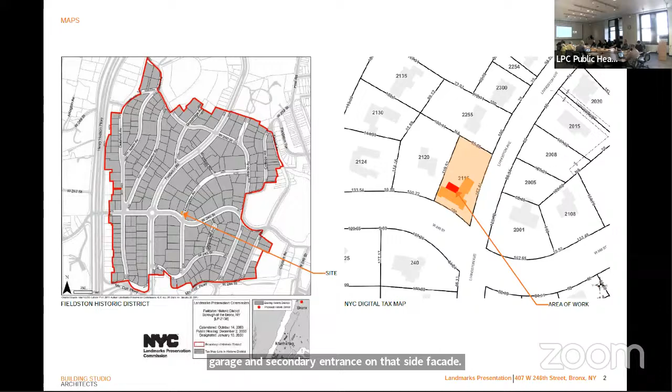So then once again, to orient you, at the corner of West 246th and Livingston Avenue, it is an L-shaped building with the primary entrance on West 246th and the garage and secondary entrance on that side facade. The area marked in red here is the location of an existing addition above which the proposed addition will be constructed. As mentioned, the house was designed by Dwight James Baum in the Georgian Revival style, and here you can see the original plan on the bottom right of the building.

Moving ahead. So to address the concern regarding the finish of the building, the color was changed from white to a light gray, intended to complement the existing slate roofing.

And here are some examples of existing additions in the district that were previously approved by the commission, including this one at 5011 Waldo Avenue, another Baum designed building. Also 4637 Grosvenor Ave. And here are 2 additions that were constructed prior to the designation of the district, including at 4655 Grosvenor Ave and 4547 Livingston Ave.

These images show the mock-up that was completed last year with the original massing of the proposed addition. This is the only view where you can see the addition from a street.

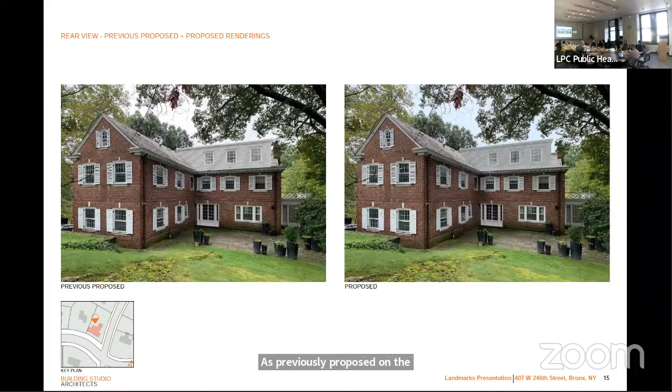Here you can see an updated rendering of the rear facade of the addition, just noting that the one previously proposed on the left is actually incorrect, but you'll see the actual previously proposed elevation in the next slide. So that is on the left.

To address the concern of the massing of the addition, it's been set back from the rear facade of the existing addition approximately 3 feet and the side by 1.5 feet. Additionally, the fenestration has been simplified and a small hipped skirt roof has been added, replacing the previously proposed splayed roof addition at the side.

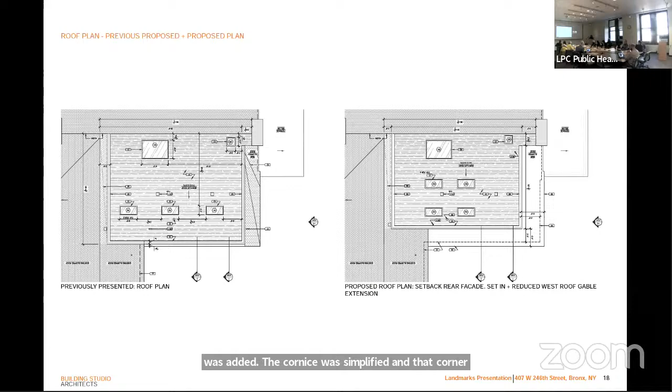Here you can see the changes to the side facade. A window was added, the cornice was simplified, and that corner pier seen on the left was removed. And here's a comparison of the proposed plans showing the setbacks and the change in the proposal at the adjacent roof.

So, detailed sections of the previously and currently proposed conditions, previously on top and current on the bottom. And the side rendering - again, the color of the addition was changed in response to commissioners' comments about the white finish prior.

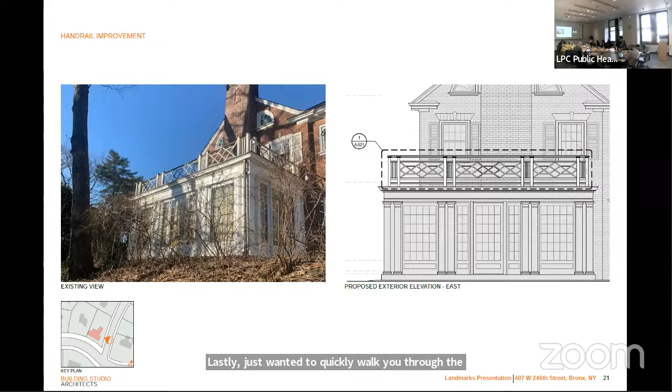Lastly, I wanted to quickly walk you through the aspects of the work that the commissioners were in support of last time, including the replacement of non-historic railings at the two enclosed porches on the sides of the building. The new railings will have a code compliant height along with a metal mesh backing, also to comply with code requirements, while recreating the proportions of the historic railing in the center position. Here's that side facade view of the same railings.

And just showing the historic on this slide.

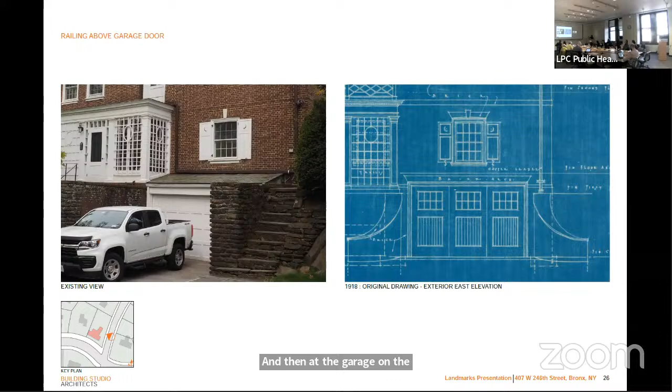And then at the garage on the right, the original garage design was later extended farther out as seen on the left. The proposal is to flatten the roof of the garage, which currently has a slope, and install a walkway on top with railings to match those of the porches, in order to provide direct access to the rear yard as shown here.

And then a new door will be installed at the side, and the existing lattice work will be removed and salvaged for reinstallation. Here's a detail of the door and the reinstalled lattice work proposed there.

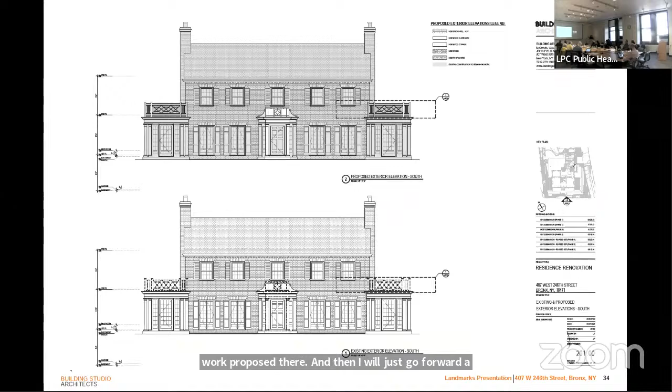And then I will just go forward a little bit to show a good image of all of the proposed work. Let's see, I think this slide is a good one to stop at. The architect is here and can answer any questions that you have as well.

So commissioners, do we have questions for the applicant? Yeah, I just want to clarify for Russ - what specifically were our concerns last time?

I remember there were issues of the rooftop massing. Right, so for last time, everybody supported the change to the garage roof line, converting the window to the door to create a walkway, and installing railings that match the historic design but modified to be code compliant.

So everybody's comments focused on the rooftop addition, and I think the general sense is that it should read more like a dormer. So we suggested that they set it back from the rear and set it in from the side, because they had a funny kind of splayed roof to deal with the connection at the side - so eliminating that, setting it back on the side and at the back. And then we also had concerns about the scale of the windows, so they've reduced those to be more in line with the rest of the house, to overall make the addition read as a dormer. And they also changed the color, which was another comment we had.

Thank you. Okay, any other questions?

All right, so let's move to our discussion. And I think we all, as I said, supported all the components of this application and even the concept of a rooftop addition. But in this location, on top of a modern addition, we felt it should be treated and expressed more as a dormer. And the applicant has made all of the changes that we had suggested.

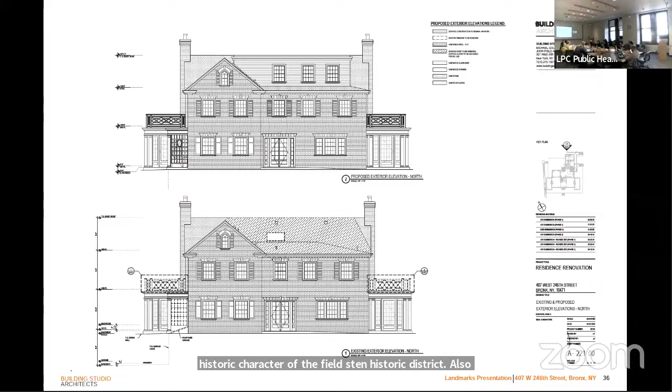I also note that at some point after 1918, the garage was modified to extend beyond the plane of the facade. I further note that in 1938, the NYC City Planning Commission created a special zone for Fieldston, limiting new construction to single-family residences, and that in 1974, the Planning Commission established the Special Natural Area District to guide development and preserve significant natural features by requiring CPC review of site alterations and new development.

I recommend approval, finding that the work will not damage, eliminate, or conceal any significant architectural features, that the proposed rooftop addition will not be visible over a primary facade and will only be visible over secondary facades from oblique angles, that the materiality and finishes of the addition, featuring light gray finished wood cladding, white finished multi-light windows, slate roofing, and copper gutters, will be compatible with the materials of the main house.

That the addition will be inset from the facades and terminate below the roof line of the main building, resulting in a subordinate presence at the roof, that the proposed portion of new roofing will recall a hipped roof and will help to break up the massing of the addition when seen from the street.

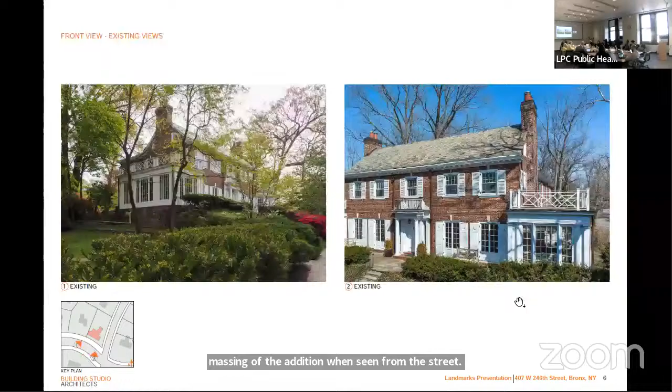That the existing railings at the porches are not historic and are in a deteriorated condition warranting their replacement, that the proposed railing design will closely recall the design of the historic railings at the porches while providing code-compliant fall protection by introducing mesh backing that will only be minimally perceptible from the street.

That the garage was altered and extended over time, therefore the removal and flattening of the existing non-original slate roof will not eliminate a significant feature, that the proposed railings at the roof of the garage will match the design of the railings at the porches, thereby helping to unify the design of the facades.

That the design of the proposed multi-light door and side light at the historic secondary entrance vestibule will be based on existing historic doors and windows at the house and will harmonize with the remaining infill at the vestibule, that the existing historic lattice work will be salvaged, modified, and reinstalled in the existing location, and that the work will not detract from the special architectural and historic character of the building or the Fieldston Historic District.

I recommend that the applicant continue—oh, no, well, I think it's a straight approval. Okay, great, thank you. All right, Commissioner Chu, would you second that motion?

Second. Mark: Chair Carroll, aye. Commissioner Chapin, aye. Commissioner Chu, aye. Commissioner Ginsburg, aye. Commissioner Jefferson, aye. Commissioner Lutfi, Commissioner Master, aye. With 7 in favor, none opposed, the motion.

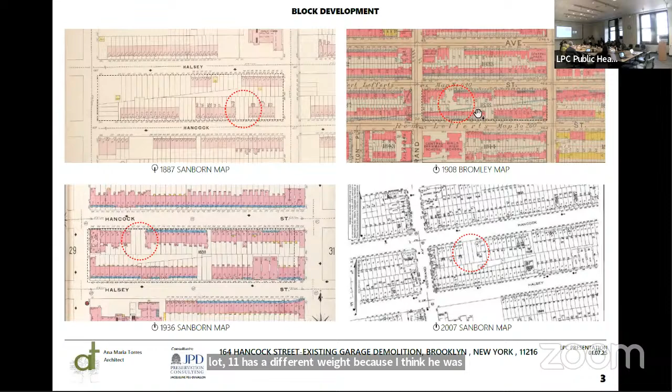That's what you see, and then you see here it's also on a diagonal, and it has been like this, I think, because reading a little bit about 168, and maybe I am confused, he was the developer of some of the houses, then this is why he kind of recreated between these 3 lots. Also, the width of the lots is different because in reality it should be 4 lots, but he recreated it so 168 has a larger width, for example. Then lot 10 has a different width, and lot 11 has a different width, because I think he was the developer, then at that time he kind of recreated it. Then it has that interesting shape of that diagonal.

What happened is originally this part, the garage plus this arm, belonged to 168, but the new owner did a reapportionment with lot 10, and lot 10 is the one that keeps the L-shaped part of the lot.

I'm sorry, this is beyond the application, but I'm just very curious because I've never seen a block like this. What are the rights to build a new structure in this block? Is it in that spot?

The proposal that came to us was to demolish the garage and then construct a new building on lot 10 at the street wall, so it would look like a row house out on the street.

So then this would be rear yard. This was going to be landscaped rear yard. I was just wondering if the existing structure allowed any kind of grandfathering, because with the rear yards there's nothing that isn't rear yard. That's why the plan was to have that be rear yard.

The new plan will be that the building is located here, aligned with the facade, and then in here will be just a communal garden. Thank you. Any other questions? Okay, so I think we can move to our discussion on this one.

This one's pretty straightforward. We've already approved a new building on the lot to the left of lot 10, and then we saw an application for lot 10, which included demolition of the garage and a new building on lot 10 facing the street. We had comments about the depth of the addition, the new building, and its design at the rear.

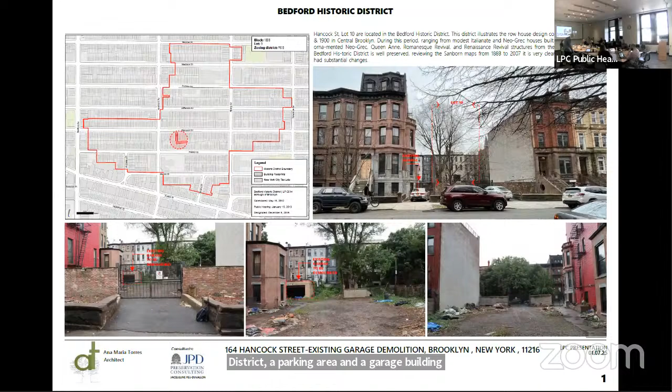I note that the lot is within the Bedford Historic District, which consists mainly of masonry row houses constructed between 1870 and 1900, ranging from modest Italianate and Neo-Grec houses built in the 1870s to lavishly ornamented Neo-Grec, Queen Anne, Romanesque Revival, and Renaissance Revival structures from the 1880s and 1890s.

I recommend approval in part, finding that the existing garage is a simply designed secondary structure built later than the main house at 168 Hancock Street, and is not a unique or significant example of historic buildings of this type, and that the garage is set significantly back from the street, is only seen from limited views from a public thoroughfare as a background element. Therefore, its demolition will not detract from the site, streetscape, or historic district.

Thank you. Commissioner Ginsburg, would you second that motion? Second. Mark, will you call the vote? Chair Carroll, aye. Commissioner Chapin, aye. Commissioner Chu, aye. Commissioner Ginsburg, aye. Commissioner Goldblum, Commissioner Jefferson, aye. Commissioner Master, aye. With 7 in favor, none opposed, the motion passes.

Okay, thank you very much. All right, we'll move to item number 3 on our public meeting agenda.

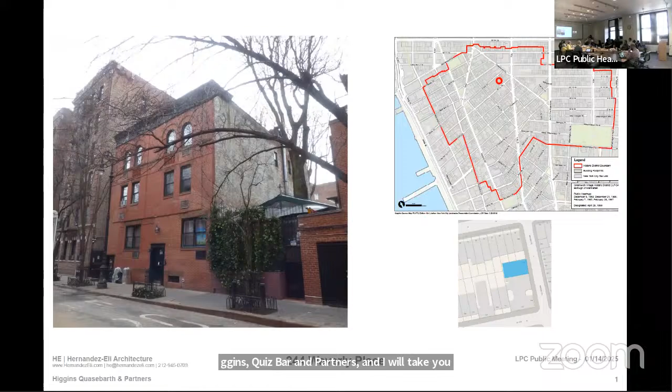Good morning, Commissioners. Sarah Sher, Higgins Quasebarth and Partners, and I will take you through the revisions to the 244 Waverly Place proposal that you saw on December 10th. Juliet Hernandez-Eli from Hernandez-Eli Architecture is also here and available to answer any questions.

On December 10th, the Commissioners were largely supportive of the work that the Director of Preservation just summarized, but had concerns about the visibility of the rooftop addition as well as the design of the rear elevation. So today I will present the changes to those two aspects of the proposed work.

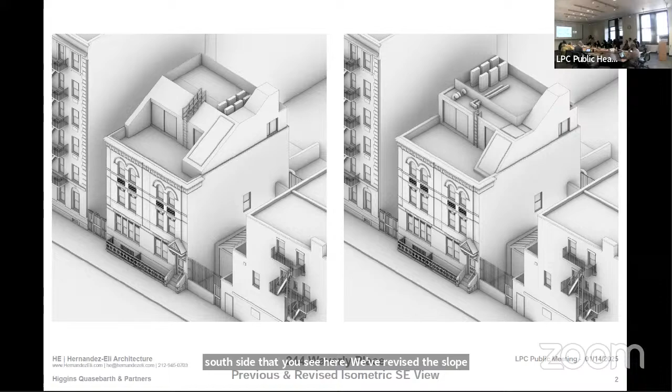Here we have the previous proposal for the rooftop addition on the left and the current proposal on the right. To summarize the changes, we removed the wall on the south side that you see here. We've revised the slope of the stair bulkhead to make it steeper, which allows it to be shorter. This also allowed us to remove a parapet that was running north-south across the front that was providing code required life safety.

We changed that into a setback mesh fence, which exposed some of these mechanical systems, but we determined those to not be visible from the street. However, lowering this did make these condenser units visible, so they've been switched to the south side of the property.

And then just looking from the other side to show again the removal of that sidewall, the revised slope of the bulkhead, and then pushing all of this back and also allowing the front of the rooftop addition to be much shorter. This is the front elevation, just showing that effect in elevation of making the revised slope of the bulkhead read lower, and then that mesh that lightens up the reading of the rooftop addition.

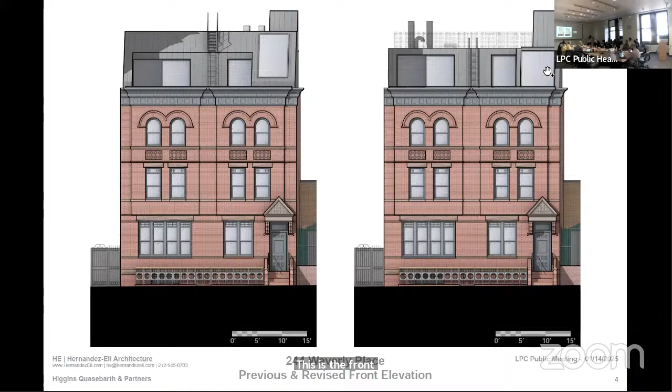You also notice - I'll move a little farther away - that the FDNY ladder can be moved to just be a straight run up and not at an angle the way it was previously.

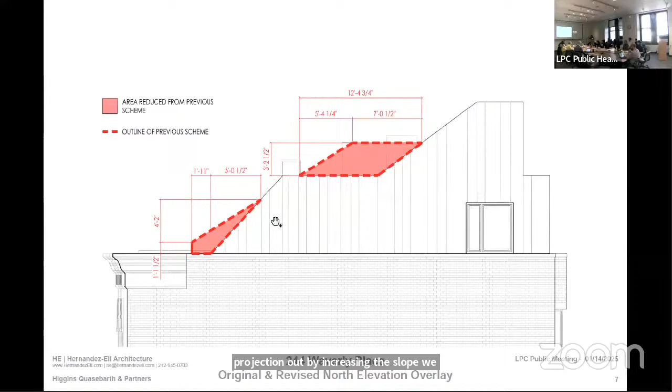South elevation showing the removal of the sidewall and the change from a parapet to a mesh railing. And then again, going to the north, just to show dimensionally the decrease in height and also projection out by increasing the slope. We set back the addition 1 foot 11 inches, almost 2 feet, and then we get rid of about 3 feet 2.5 inches of height from the top.

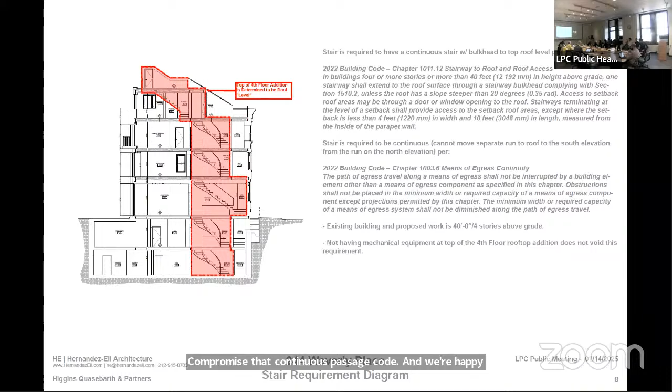There were a lot of questions about code and what code requires in terms of stair bulkhead and its location on the side elevation. We restudied this just to make sure that what we were proposing was really the only option. We looked at trying to rotate it, to move it back, but because of 2022 code that requires a continuous stair all throughout the house up to the roof, and there has to be a continuous passage between that, even just a little bit of adjustment compromises that continuous passage code. We're happy to go back to this if there are any specific questions about the 2022 code requirement.

This is a section through the stair bulkhead that goes up to the roof of the addition. We're showing a 6 foot 8 inch floor to ceiling height, which is the minimum required to meet code for that part of the stair bulkhead.

This is a section through the occupiable part of the addition, looking west, showing the 8.5 foot floor to ceiling heights, but also just showing that we have an elevator shaft that requires this amount of clearance in order to stay within the existing height of the rooftop addition and not requiring a bulkhead above.

So we revised the mock-up to reflect this revised proposal. Reminder that the proposal was never visible from across the street in front of the house.

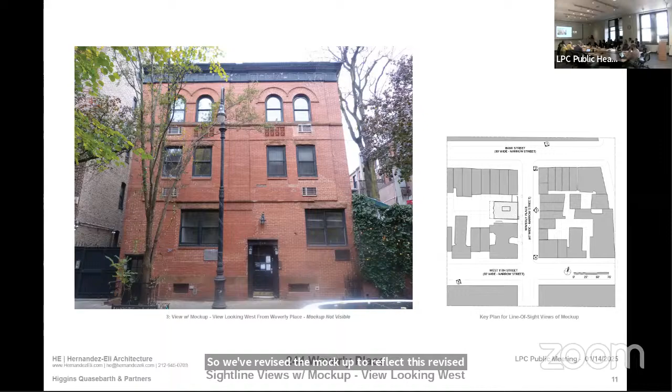From West 11th Street and Waverly Place, we have the previous proposal on the right and the current proposal on the left, and the zoomed in view showing the reduction in visibility.

Going directly adjacent to the house on the south, previous on the left, current on the right, showing a substantial amount of visibility reduced by the revisions.

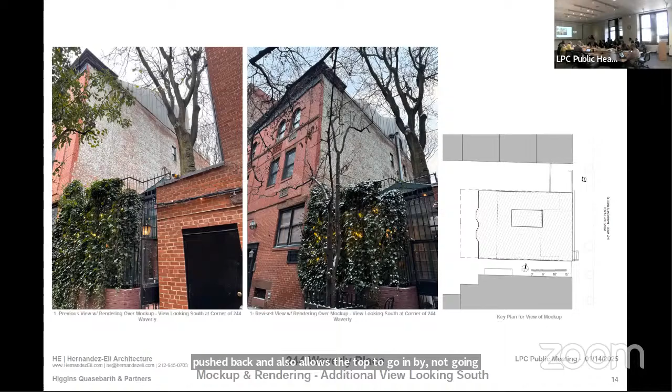Going right next to the house to the north, showing over the side elevation, that steeper slope allows it to be pushed back and also allows the top to go in by not going as tall and also setting back with a mesh railing instead of a parapet.

And then that view from Bank Street and Waverly Place, this steeper reading also is more in keeping with the roof line of a studio skylight, I think. You'll see the FDNY ladder, which was previously visible, now is sunk down and not visible from this vantage point.

Going around to the rear, commissioners were largely supportive of the reconstruction of the rear facade, but had concerns about the design, taking away the reading of 2 houses, and wanted to see more extension of the division to the bottom. So we brought the brick pier all the way down to the bottom.

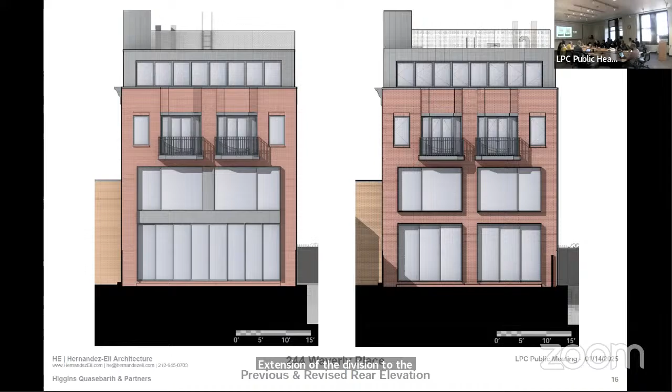We also have a brick spandrel in between the 1st and 2nd floor so that these read more like punched window openings. And the scale of these openings are in keeping with what commissioners approved throughout the Greenwich Village Historic District.

And while majority of commissioners were supportive of the proposed work at the front facade, just wanted to reiterate the appropriateness of this scope. When the existing facade was disfigured in the 1950s intervention, it lost its reading as 2 separate row houses. This isn't only because of the removal of the 2 stoops and the installation of a central door and a side service door, but also the

modification of the sill locations to be raised up to allow for standard double hung windows to be placed in, created an overall composition of an apartment building character.

Additionally, the various masonry opening changes butchered the historic sill and band courses and removed the horizontality of the facade. So this proposal restores these window openings to their original heights, which gives that scale of the 19th century row house development. It also restores the missing brownstone and terracotta banding, returning horizontality to the composition.

Although there's only 1 entrance in this proposal, it reads much more as a row house development than the existing condition that has 2 doors because of these restorative notes.

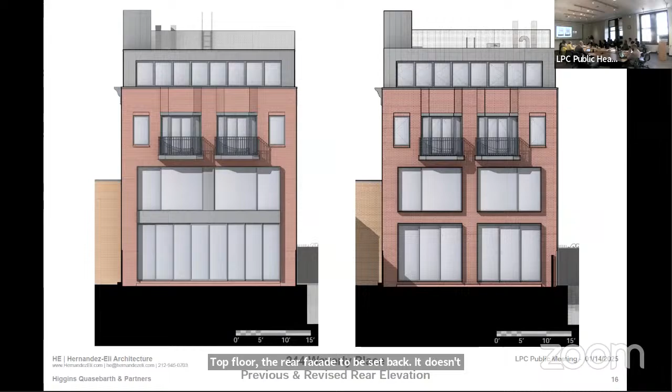Facade. You're talking about this? Yes. Part of it? It is slightly set back. Right? Yeah. Do you want to come up?

Yeah, just state your name for the record also. Oh, yes. My name's Juliet Hernandez-Eli. And if we go,

it's best illustrated in this section. In this section, so it is slightly set back from the rear, just a small setback amount. We couldn't set back any further without encroaching on the minimum room size dimension. So we would have lost both bedrooms on the back of the facade.

Thank you. Any other questions?

All right, I think we can then move to our discussion. So as was presented, the last time we saw this application, we noted that the building had undergone a lot

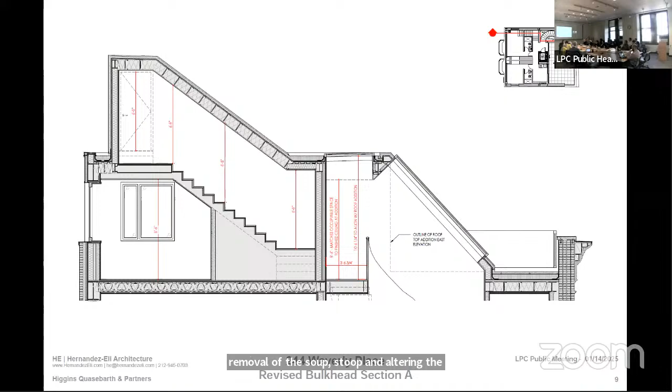of alterations in the mid-20th century with the removal of the stoop and altering the windows, which essentially turned it into an apartment building. And so the last time we saw this, most commissioners supported the approach to the facade and actually complimented the level of restoration of materials and fenestration.

Most commissioners felt it was not necessary to create a false door on one side of the building, based on the history of alterations and the fact that it was a freestanding pair of row houses. But everyone agreed the bulkhead should be smaller and less visible, and there were various suggestions on how to do that. So the applicant made a number of changes, including lowering one portion of the bulkhead.

Eliminating the entire parapet and shifting mechanical equipment. Most commissioners were comfortable with cutting back the rear facade and its design, but every one of them felt there should be more articulation, particularly at the double height glass windows, and suggested bringing that vertical pier down. So the applicants have presented a revised proposal today that introduces a vertical pier down the center of the double height window assembly.

So we'll begin our discussion. Commissioner Ginsburg, I think you also talked about setting the rooftop addition back further. I think two commissioners mentioned that. In general, I'll be interested to hear what others say, but the issues we raised last time have been addressed, and this is a significant improvement on the design, so I think it's appropriate and I can approve it.

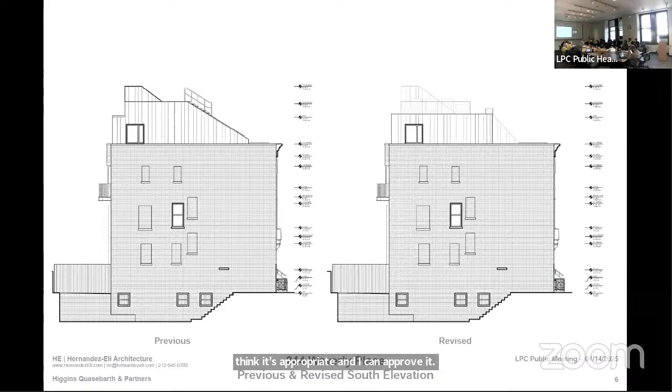Commissioner Chapin? Yeah, I agree that the changes to the rooftop, the setback, the lowering of the bulkhead, move it, make it more acceptable than previously. I can also approve the changes to the front, which move it closer to the historic condition. And the changes in the back with the fenestration and the pier improve its relationship to other rears and make it more appropriate. So I can approve this as presented.

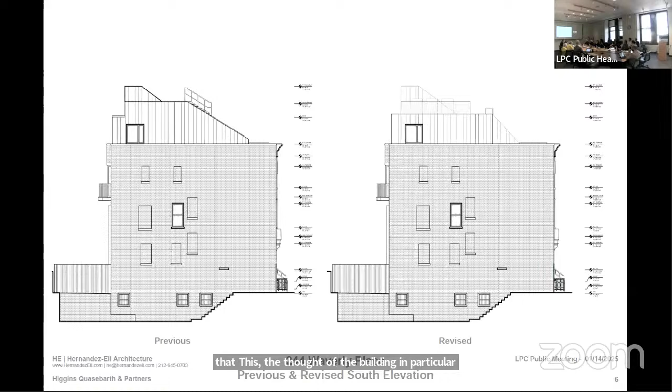Commissioner Lutfi? I agree with my fellow commissioners. I do want to say that this facade of the building in particular was severely altered in such a negative way, and I really appreciate the hard work the applicant has put into this and their responsiveness to our input. I think all of the changes they made, both on the front and the rear, work very, very well, and I can approve this.

Commissioner Chu? Yeah, I think the improvements have all moved the design to a less prominent rooftop addition, and that's where some of our concerns were, that some of the mass was unnecessary. It looks like they've spent a lot of effort to really make it work. I like that it has a more contemporary aesthetic - I think that's actually a plus. Because of its reduction it sits well on the existing building mass, and the overall work to the front facade is fantastic. We're really excited about this project.

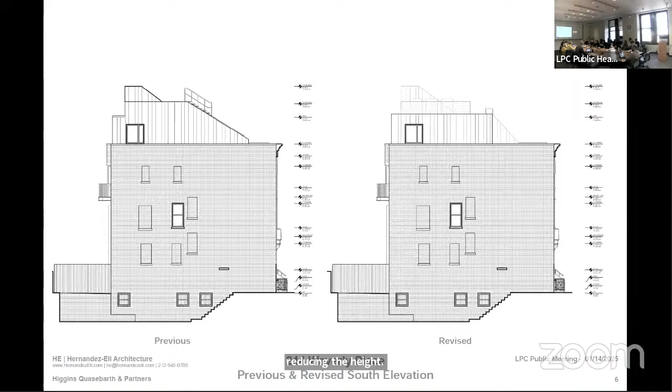Commissioner Master? Yeah, the applicant did a very good job reducing the bulkhead visibility, setting it back, reducing the height. They did a lot of little things that really make a big difference. And in the rear facade, bringing the brick pier all the way down addresses the concerns we had about making it appear to reflect the history of its having been two separate buildings. I think they did a great job - it's appropriate.

Commissioner Jefferson? Yeah, the proposed design is much better than the existing building, and the comments by the commissioners really helped improve it. The size of the penthouse - all our comments really made the proportions really nice. I think it's an excellent job. And if it was pushed back 3 feet...

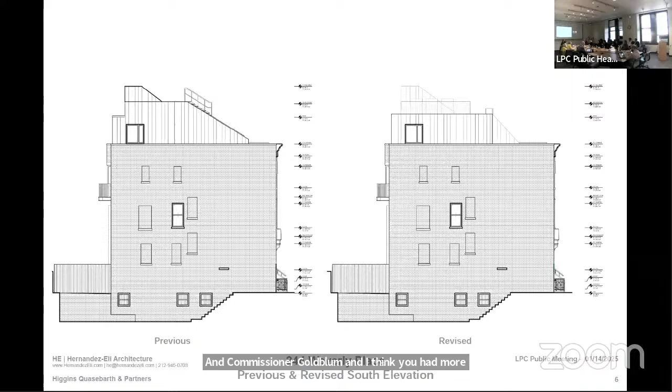I'll just leave that as a question, but it's very well done. Thank you. And Commissioner Goldblum - I think you had more concerns about this application at the rear. Yeah, I think it's been significantly improved and I'm okay with it. Okay, great. All right, so I think we have a consensus to approve.

With regards to LPC 25-04036, 344 Waverly Place, Greenwich Village Historic District, a pair of Romanesque Revival style row houses designed by William B. Trumbull and built in 1886. The application is to combine the buildings, modify the front and side facade, lower the area way, reconstruct the rear facade, construct a rooftop addition, and excavate the cellar.

I note that the building style, scale, material, and details are among the features that contribute to the special architectural and historic character of the Greenwich Village Historic District. I further note that the building was originally built as two separate houses which were combined between 1959 and 1961, prior to designation, as one apartment building with both stoops removed. I recommend approval, finding that the buildings, historically built as a pair of houses, were combined into one apartment building and heavily altered over time with the loss of both stoops.

Therefore, the proposed alteration at the first floor will bring it closer to its historic appearance. The reconstruction of the stoop at the north building will recall the historic stoops once located at this facade in terms of placement and basic design details, and the adjustment to the stairs to correspond to the altered conditions at the parlor floor level will not call undue attention to itself.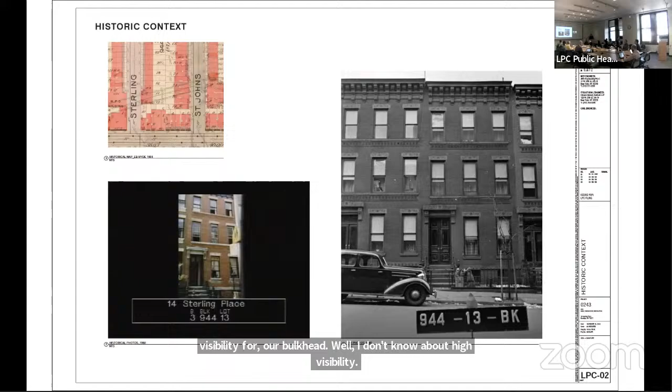Existing conditions: the rear yard addition is again a single story with a terrace on top. Our intention is to replace that with a two-story addition that is about 3.5 feet shallower in its extension from the back facade.

Some more photographs of the roof, some existing chimneys that were required to extend. You can see the neighboring building was restored and renovated.

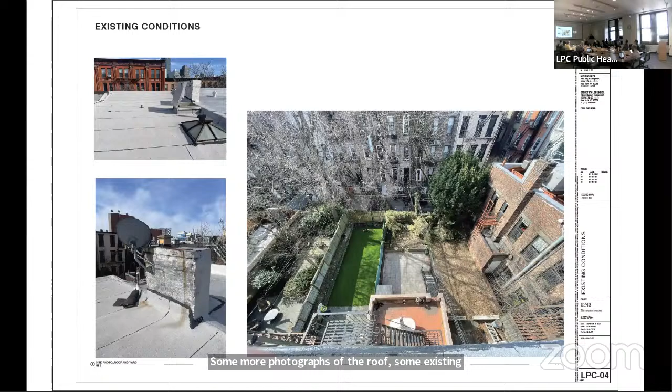Demo plans. We're replacing the stair with a code-compliant riser and run stair, which essentially sits in the existing location of the historic stair, but obviously has to get a little bit bigger on account of our current codes.

We have shown the plans here, you can see the stair. And important to note is the rooftop—I think we have a bigger plan of that further in the presentation. Existing section. Proposed section.

And then the existing and proposed. The bulkhead is set back from the street. We've drawn it—it's quite striking the way we've drawn it. It will have a very large skylight to bring light into the middle of the house.

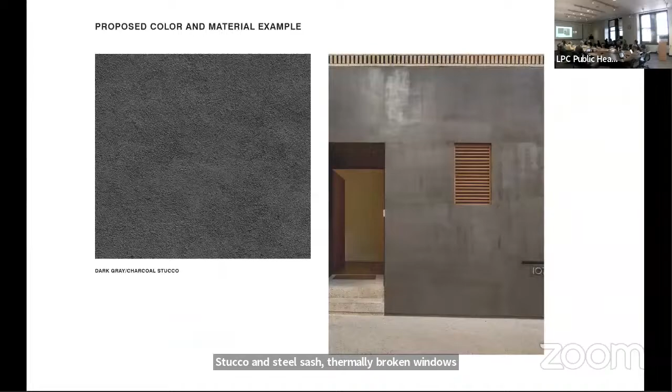On the back facade, we have the two-story addition comprised of darkened Portland cement stucco and steel sash thermally broken windows. There's a sample of the Portland cement and a plan of the roof deck showing the bulkhead setback from the cornice line, and a little more detail of the bulkhead from up on the roof.

And then some views—it's not visible from directly across the street. Actually, it's not visible in any of these views. However, it is visible when we look on... there's the sight line from across the street. You can see it's quite well concealed.

But then when we start to look on the diagonal from further up the block, you can see how that street wall having a recess makes it more visible. I don't know if there's a laser pointer here, but if you can imagine, this is our property here that we work with, and the setback—you can imagine the cornice line extending. We never see it, but because it doesn't, we do.

There's the mock-up on the roof, upper right, and then some detailed photographs of the mock-up as it's visible from down the street. The one on the right is really zoomed in for clarity. And that's our presentation.

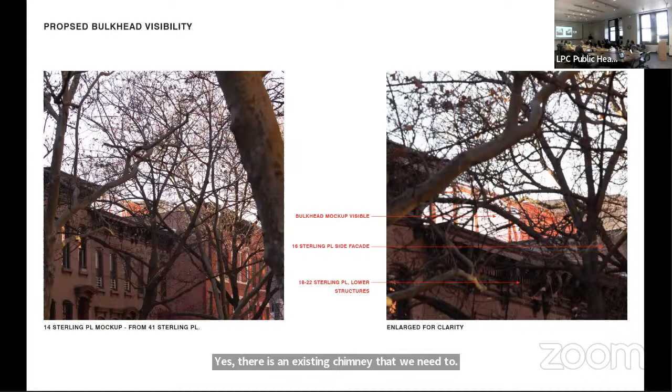Great. And there's something behind your mock-up—is that a chimney or? Yes, there is an existing chimney that we need to... What you're seeing behind there is... you have to go up to the drawing—building on Fifth Avenue. Yeah, so that's the building across from that.

Okay, so it's a larger... what building? You gotta stand up to speak. Yeah, so what you're seeing beyond the mock-up of this bulkhead is on a different lot. Okay, it's a building behind.

All right, is there anyone with questions? Do we have any questions? Yes, Commissioner Jefferson? Did you have a question?

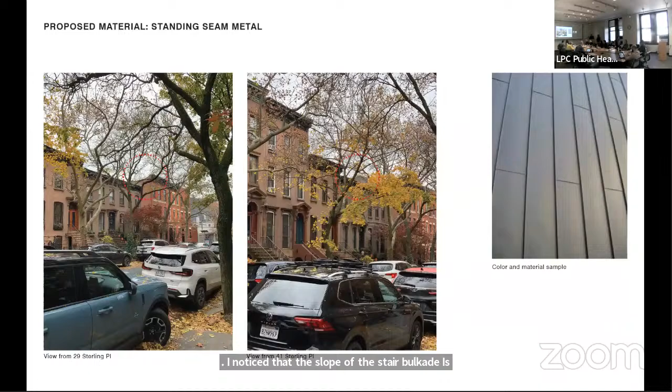Oh, okay—Commissioner Ginsberg. I noticed that the slope of the stair bulkhead is shallower than the slope of the stair. Could you have reduced that a bit by making... is there a reason for that?

Yeah, let's go back to that section. What we were trying to achieve—we were trying to get a bulkhead that matched the encasing walls of the stair, so that the volume of the stair would rise as volume all the way to the roof. That's why we have the bulkhead as long as we do, and the angle is really set for minimizing the top height to about 7 feet—it's the resulting angle to achieve that volume.

Thank you. All right, yes, Commissioner Chapin. The rear addition is going to be stucco.

Yes. If you could just indicate—is this common in this block, for rear yard additions to use stucco, or?

Yes, it is. In fact, many of the brownstones here have been overclad with stucco as opposed to repointing. Ours has that—it's a throw coating that was done in the 70s. So it's a fairly typical expression. We are not going to use Dryvit; this will be a traditional cement stucco.

So the houses on either side of you also have been stuccoed over? Yeah. Okay, thank you. All right, any other questions? Okay, we're going to move to public testimony and we'll come back to you. Is there anyone in the room who would like to speak on this item?

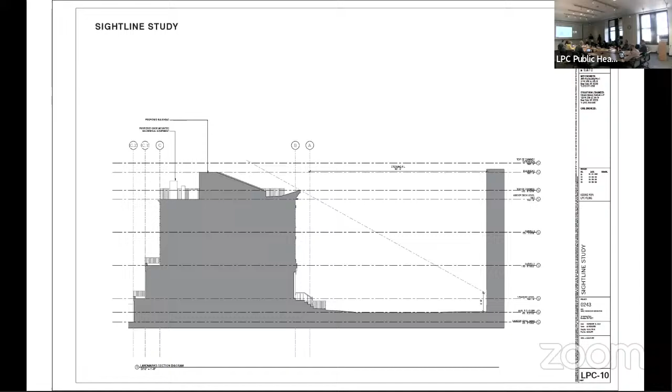The comment about the glass, I appreciate the comment. We've tried to break down the glazing in a scale that seems appropriate given the size of windows above. But of course, we're making an addition to a townhouse, and townhouses can be challenged for light because they don't have side windows. So we would love to keep as much glazing as possible to make a bright, airy interior to this great house.

And it's narrower than usual. Yeah. Any final question? The sidewalls on that new rear addition, they don't look like they quite line up with the edge of the windows above. Or on one side, they clearly don't. On the other side, it looks like it's a little thinner. Let's see. We'll go to the plan.

So on the front facade, as you would traditionally expect, the windows are centered on the building, but they're actually off center on the rear facade. On the left side, I don't know if the pier seems narrower than the pier above. I realize on the right side, the pier is much bigger than above. Is that lined up on the left side or not? It does not line up on the left side. It's symmetrical on either side of the addition, but not lined up above.

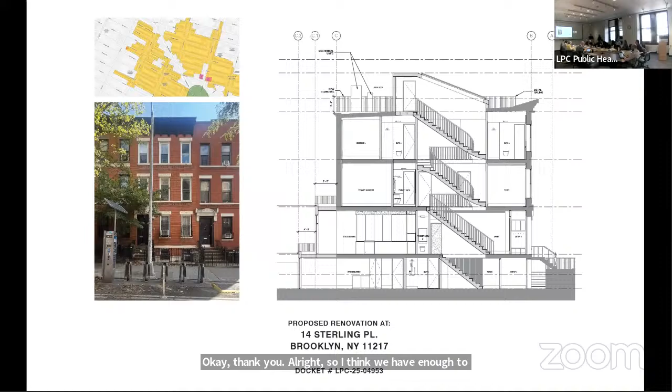In the matter of LPC 25-04953, 14 Sterling Place, in the Park Slope Historic District Extension 2, a neo-Grec style flats building designed by Louis Bonnert and built in 1889. I note that the building's style, scale, materials, and details are among the features that contribute to the special architectural and historic character of the Park Slope Historic District Extension 2.

I recommend approval, finding that the proposed work will not damage or eliminate any significant architectural features, that the proposed rooftop bulkhead will not be visible directly over the front facade and will only be visible from the east along Sterling Place, that the design and materiality of the rooftop bulkhead, featuring a sloped roof with skylights and a gray standing seam metal finish, will be in keeping with the character of utilitarian rooftop accretions found at other buildings throughout the historic district.

That the proposed rear yard addition will not be visible from any public thoroughfare, that other rear yard additions with a similar height and depth exist within the block, and that the proposed 2-story rear yard addition with stepped back second story will be modest in scale and will not overwhelm the building, adjacent buildings, or the central green space. That the rear yard addition will not rise to the full height of the building, thereby preserving a sense of the building's original form and fenestration as part of a row.

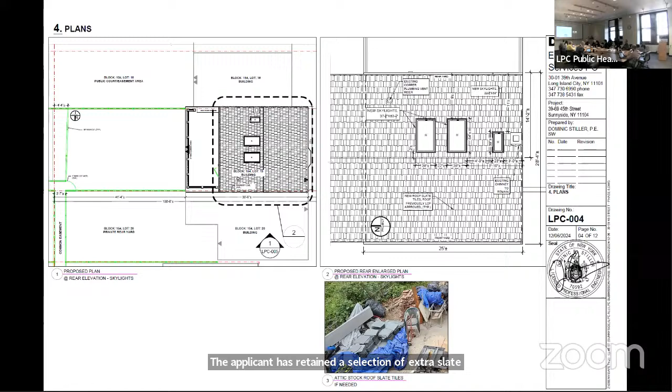Here are additional details for the skylights, which have a slim low profile similar to other skylight installations that the Commission has recently approved throughout Sunnyside Gardens. This is a close-up of the 3 skylights at the rear roof slope as installed at the top.

Skylights are a common feature throughout the historic district as shown in this map. The subject property again is shown in red. Skylights present at the time of designation are shown in pink, and skylight locations previously approved by the Commission are shown in blue.

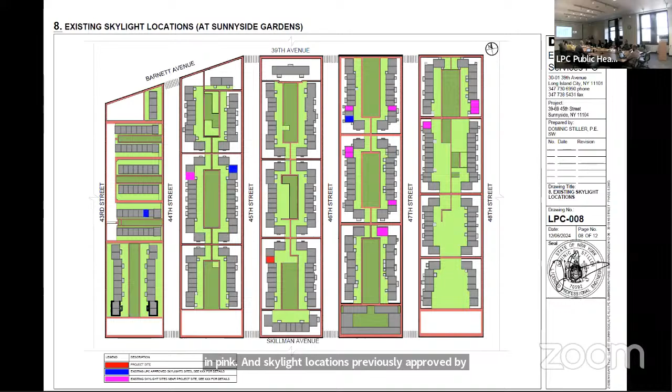Here are some photos of some of the Commission-approved skylights as installed. Again, they're primarily at rear roof slopes and are either very minimally visible from the street or not visible from public thoroughfares.

These slides show some skylights that were present at designation. This is a mix of skylights both at the front and rear roof slopes, some of which are visible from the public street, but these have been present since designation.

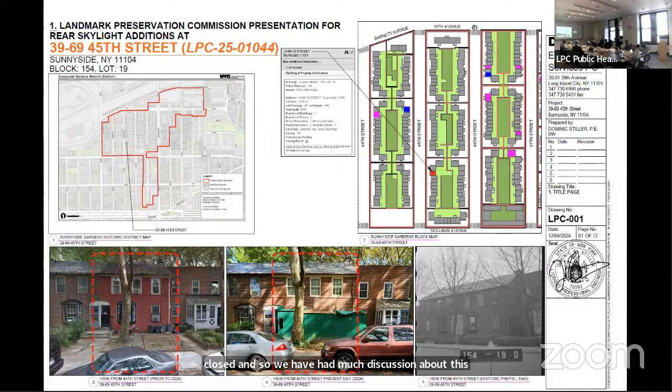We have had much discussion about this work happening without permits, and it is unfortunate that it happened without permits. I think the rest of the work was very well done, and we're grateful that you're maintaining your house to such a high standard, and we appreciate that. But I do want to stress how important it is to get permits first, because if it's work that we cannot approve, or would not have approved in the first instance, you will have spent money and time on something you'd have to redo. So in this case, as we do with all applications for legalization, we will look at the proposed work as if it were coming to us in the first instance and make a determination on appropriateness.

So we'll start our discussion. As the applicant and staff have pointed out, we have approved skylights on the slate roofs in this historic district, particularly facing the back into the courtyards, and these skylights are consistent with those in terms of size and placement on the roof. In fact, we've recently discussed how this type of work should be something we can approve at staff level in the future. So as we think about amending our rules to streamline the process, this is a work type we'll be adding to that proposal. Commissioner Jefferson, would you like to start with this one?

After this presentation, I think in this particular case I can approve this. It's unfortunate, but I can approve it. Commissioner Goldblum: I agree, I think it's the kind of thing we would have approved at the outset. Commissioner Ginsberg: I agree, this is approvable if it had come to us originally. I am troubled by the willful disregard of our rules.

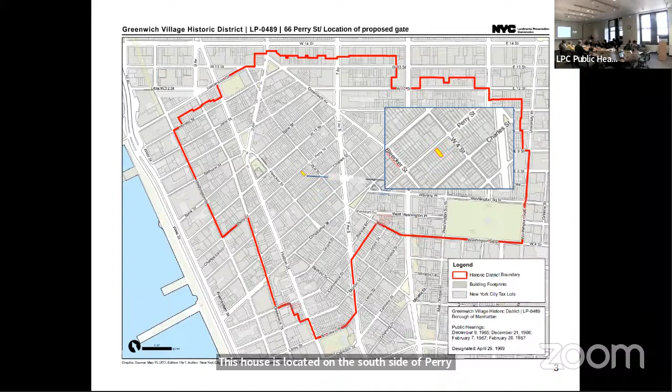This house is located on the south side of Perry Street between West 4th Street and Bleecker Street, and the application before you today is to install a gate at the stoop. In this slide, you can see the locations of some other stoop gates previously approved by the commission, which I'll show you a little later in the presentation.

Here you can see the house in the 1940s tax photo. It's the one second from the left that still retains its details at that time. On the left is the house in 1978 when the current owners purchased it. As you can see, the stoop had been removed by this time. On the right is a more recent view of the house showing the restored stoop and ironwork, which was undertaken after commission approval in 1983.

Here are some context photos of the block showing varied conditions, including various townhouses and apartment buildings with different types of stoops. And here's the owner's proposed design for the gate, which will match the details, materials, and finish of the existing railings at the stoop and at the areaway fence.

Some additional close-up views of the existing conditions at the house, showing the existing railings and fence.

And then lastly, here are some examples of prior commission approvals nearby, including 17 Grove Street, 133 West 4th Street, 168 Waverly Place, and finally 79 Christopher Street. The owner and her architect are also here to speak further on the proposal.

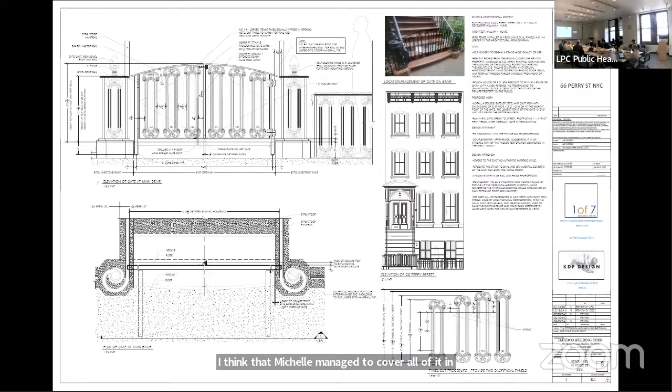Madam Chairman and Commissioners, I had remarks. My name is Barbara Lorber. I'm the owner of 66 Perry Street, have been since November 8 of 1978. I think Michelle managed to cover all of it in about 3.5 minutes without stopping for breath. I assume that if any of you looked at your phones, the newspaper, the television, anywhere today, you understand the extent of the endless presence of interest in my celebrity staircase.

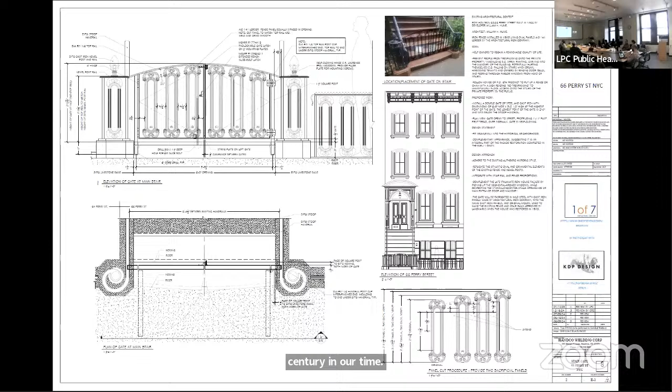But what was beautiful in the late 19th century is unfortunately in need of more protection in our century, in our time. I'd hoped for literally decades that this would pass, but at this point, I think even someone as stubborn as I am has to admit that this isn't going away in the near future.

So I wanted to do something that would add to the beauty of the front, not just look like a barrier that says this belongs to people, this is home to 3 families. Take all the pictures you wish standing on the street, but please don't climb into our space and into our windows.

I know the word anachronism, but I'm afraid what was anachronistic in the 19th century may be pretty much necessary in our century. Thank you so much for your time. I'd like to let Izzy tell you the really important good stuff.

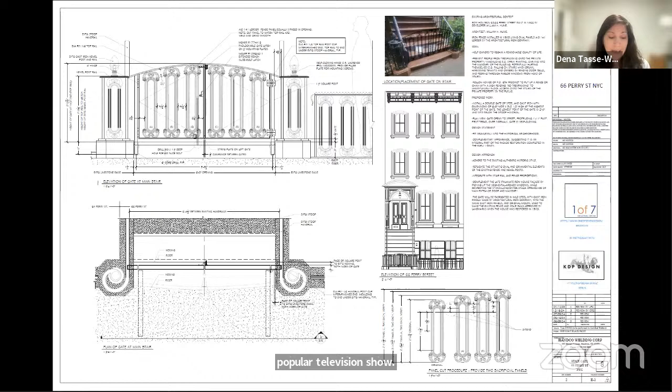Good morning, Commissioners. My name is Dena Tasse-Winter, and I'm speaking today on behalf of Village Preservation. Village Preservation is sympathetic to the need for a stoop gate at this particular location, which has become a tourist destination due to it being featured on a popular television show. We support this application, and we find the proposed gate design to be harmonious with the existing ironwork.

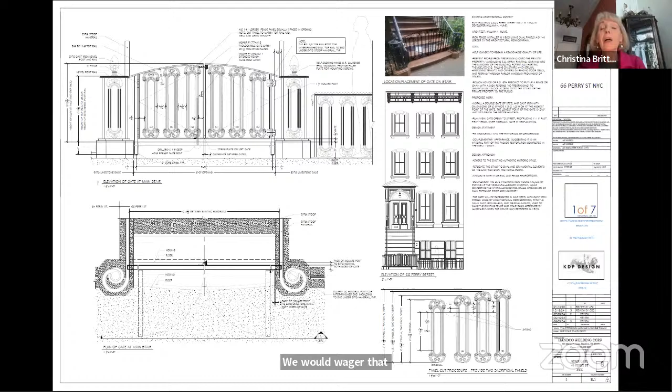As the owner points out, the extraordinary fame of Sex and the City and the Carrie Bradshaw character has turned this townhouse, and more specifically the stoop, into an entertainment landmark, and it has completely obliterated any sense of its privacy. We would wager that right now, there are probably people standing outside taking pictures. While we typically do not approve of stoop gates, we would prefer this attractive gate that complements the existing ironwork over the apparently ineffectual chain that crosses a stairway. And while this gate may also prove to be ineffective, especially if it's kept unlocked, it's an attractive alternative that is ultimately reversible, and we're willing to support it.

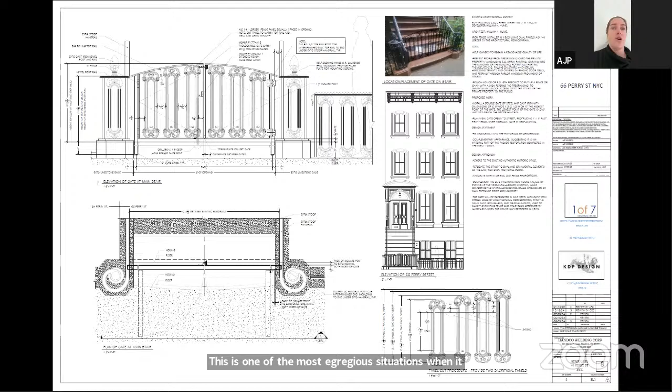This is one of the most egregious situations when it comes to personal property being attacked all day, every day. People climb all of the stoops on the street. They will climb over her chain that is there. They will go up to the top. I have yelled at people. I have spoken to people. I have been nice with people. I have been threatened. People have threatened to punch me in the face. They feel so entitled to this piece of private property that I don't think it's actually coming across how severe the situation is. So please give your full support to Barbara for her application.

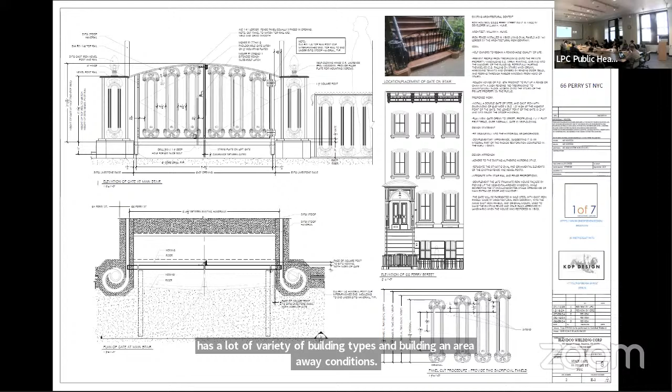It's unfortunate that we live in a time where we have to be so protective on our stoops, and I understand there's been damage done to the house, and that is of course a concern, as well as your privacy and safety. When we evaluate gates on stoops, we consider several factors: whether the building is part of a row with consistent, aligned stoops, or whether it's a one-off building, and what the character of the rest of the streetscape is. In cases where the building is not part of a consistent row, where the block has a lot of variety of building types and areaway conditions, and if it's near a commercial thoroughfare, we have approved gates at the base of stoops before. So we'll look at this application in that context and make a determination on appropriateness. Commissioner Lufty, would you like to start?

It's really very upsetting, and we've actually received a lot of applications for fences in the village for a variety of reasons. Yours is egregious in the sense that, as we've heard, you have no privacy, people don't respect your property. They see this as a tourist attraction that they're entitled to, and just attach themselves to it in a way that is not positive for your safety, your lifestyle, and the building itself.

By the way, you can see from the photos that you've taken very good care of your home. And I completely appreciate that, even though it's been adverse for you, you waited so long to try, out of respect for the intent of not having a gate in a community like this one, and other brownstone communities in the city.

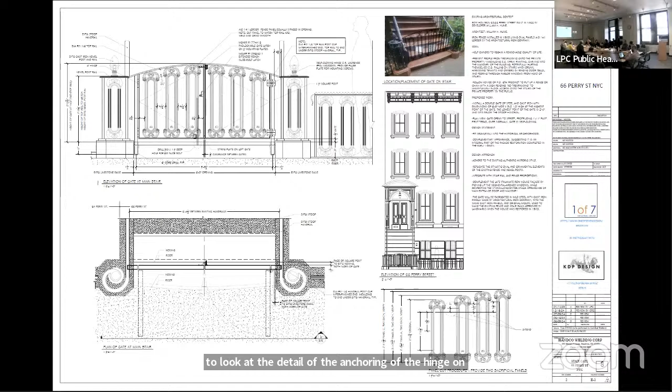I also want them to look at the detail of the anchoring of the hinge on the side, because it's quite a beautiful newel. This one is really unique, and it's porous - very open. So how that gets attached should be studied carefully, and don't attach it to the newel if you don't have to, along the handrail. I think that confuses it.

The existing house has such consistent detailing of the stair and railing on the street sidewalk, which we don't always see. I tend to feel like I would accept this design to keep the consistency, but I do think it needs to be minimized.

Commissioner Master? Yeah, I think we heard very compelling testimony as to the necessity of this gate. And it's a shame that it's come to that, and that the residents are suffering the way they are.

Initially, I had wondered about the arch on the gate, but then the architect said he was trying to recall the arches in the window. And to me, that's compelling. I understand that he's trying to create something here that's beautiful.

I'm also fine with the height, which is a little bit higher than we typically might approve, but I understand that security is a big factor here. I agree with Commissioner Chu that some of the details should definitely be refined with staff, but I can approve it as is.

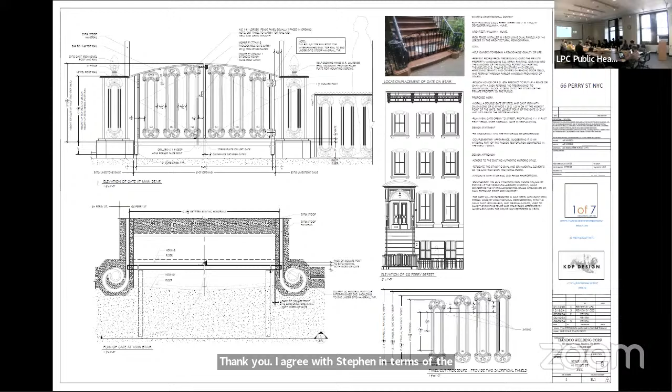Okay, Commissioner Goldblum? Thank you. I agree with Stephen that I think the design should be simplified a little bit, and that attention should be paid with staff about placement of the hinges and all that.

What strikes me about this is that we all have different windows onto what's happening in the world, whether it's at the top of a stoop or sitting at this table, we're seeing something here. And this is this week's stoop gate. Last week it was people who were suffering, criminals or drug addicts or whatever populating their stoops.

It's terribly sad that we seem to be in this period of time when these are going to become more frequent, perhaps, and we're being presented week after week with compelling reasons why what we thought was the civil order of our city is no longer the case. It kind of reminds me of roll down metal gates in front of storefronts. They were necessary, and then they weren't.

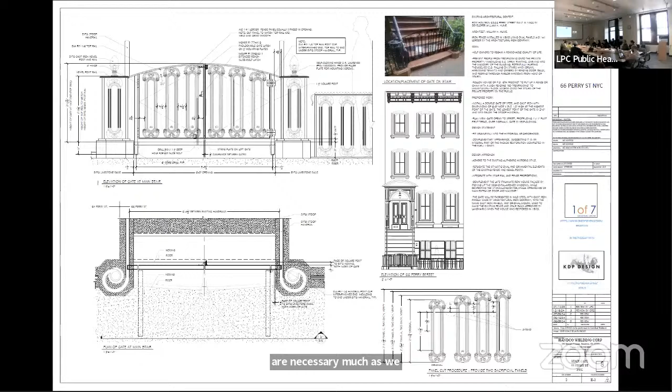And to that end, I think if these historic preservation driven approvals are led by need and governed by certain standards, this might be a place where the staff should start to develop rules about the approval of this kind of thing at a staff level. That need not be determined by us, and the style issues that Stephen and others were talking about, and that the applicants showed, can form the basis for a rules-based approval regime that would allow folks to address this need without making it into a production, and that would expedite it for them. It sucks, but it seems like this is where we are.

Thank you. Commissioner Ginsberg. I agree with most of the comments. I appreciate the problem and support the solution as necessary, as Commissioner Goldblum said, given the world today or tourism today. I agree with Commissioner Chu that the gate should probably not be arched and be simplified. So working with staff, I hope that could be resolved. But I think given the situation, the gate is totally appropriate.

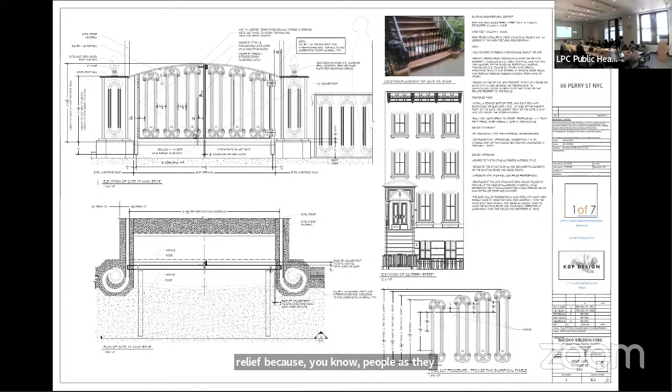I just hope that it provides the applicant with some relief because, people, as I learned in the Parks Department, will climb over almost anything. But hopefully it will be a clearer signal that this is just not appropriate in a private residence. But I hope it helps the applicant too.

In all of the instances where these requests have come before us, the applicants have at first attempted to put up these chain fences. In this case, it also has signs. Not only are they ineffective, they're unattractive, and they, in my opinion, degrade the essence of what these homes are about. I think if we're going to look at this more holistically, and I hope that we do, it would be good to reconsider that first step, because it seems like almost a waste.

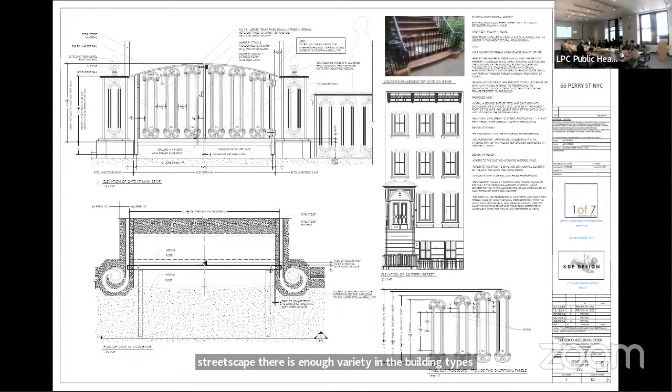In the past, when we would see applications for gates, we would often encourage people to try a chain, but we are seeing more and more applicants coming back saying the chain isn't working. I do think in this particular streetscape there is enough variety in the building types to allow for a one-off installation of a gate, but I do hear comments about thinking about it more generally, and we are continuing to see more applications. So the staff will do that as well.

With respect to the arch, I think we're split evenly on that. So perhaps what we do is make a motion to approve and ask that they simplify and work with staff on the details, and we'll see how the arch works out once there's an approach to simplifying the gate.

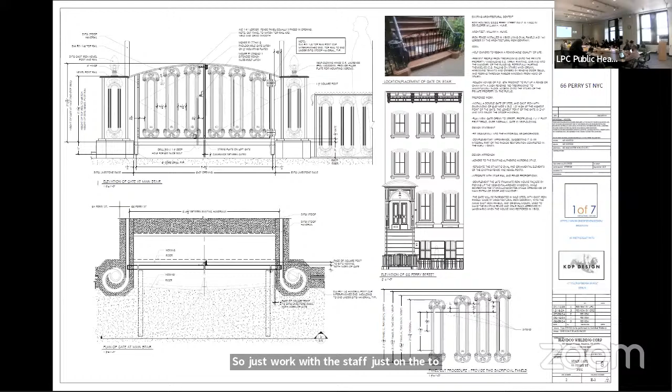I'm actually fine with the arch. Right, I had you as fine with it. So it won't necessarily be eliminating the arch, it'll be to simplify it, which may mean eliminating the arch or maybe something else, so the arch doesn't call as much attention to itself. So just work with staff to simplify the gate and work on the details. Great, thank you.

In the matter of docket 25-04-620, 66 Perry Street, Greenwich Village Historic District, a late Italianate style row house designed by Robert Mook and built in 1866.

The application is to install a stoop gate. I note that the building style, scale, materials, and details are among the features that contribute to the special architectural and historic character of the Greenwich Village Historic District. I recommend approval, finding that the historic stoop and ironwork were removed prior to designation and subsequently restored. Therefore, the attachment of a new gate will not impact any historic fabric.

That the building's use in a well-known television program has led to frequent trespassing and safety concerns. That this streetscape features a variety of areaway and entrance conditions, including other gates and fences. Therefore, the presence of a stoop gate will not diminish the relationship of this building to other buildings on the block or the relationship of the stoop to the sidewalk.

That the design details of the black finished metal gate will harmonize with the historic ironwork at the building, and that the proposed work will not detract from the special historic and architectural character of the building or the Greenwich Village Historic District. I do recommend that the applicant work with staff to simplify the design of the gate and also work with staff on the details surrounding that.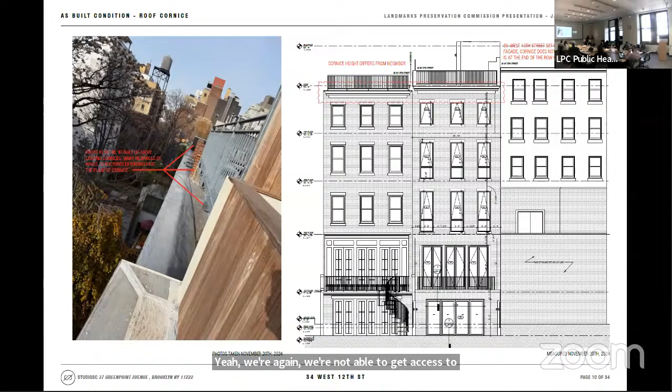Okay, thank you. And in terms of context, it looks like there's an apartment building across from the building you're pointing to with the black parapet. Yes, there is. And is the block otherwise open, or are there a variety of building heights and depths within the block? A complete variety of building depths and heights.

Okay, and the landmark staff who came with us on site kind of pointed this out and said this might be important to show. And so those two apartment buildings, is that directly behind you? Those are directly behind us, yes.

Okay, and then the photo on the left is looking to the side of your side of the block? Yes, but further over. Okay, and then the picture on the right is what's directly behind you? There's a very tall apartment building directly behind us, so it's a very shallow rear yard there.

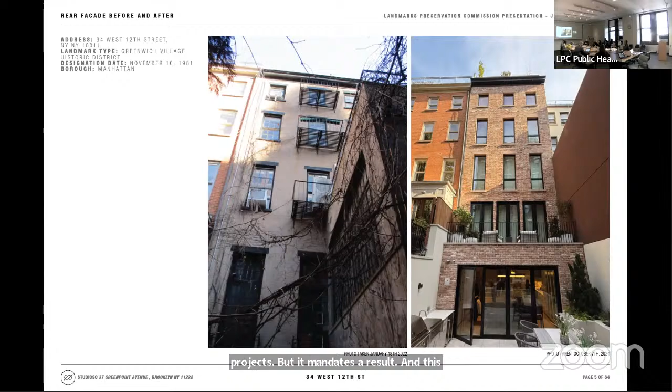The commission can't mandate a level of construction administration on the part of architects on these projects, but it mandates a result. To state that you couldn't tell the windows and the cornice were dramatically misaligned until the job was done is like saying, I'm just gonna throw the materials in a basket, shake them up, and see what comes out. If it comes out good, it's a win. If not, sorry, I'll come back and ask for forgiveness.

And that goes also for the notion of complete wholesale reconstruction of the rear facade versus retention and modification of the existing rear facade. That's a major cardinal sin in our book—we're about preserving historic material. Here, the bricks were resalvaged and reused, which is nice, but that's always a distant second place to maintaining the original construction. I think that's just not okay.

Now, after the sermon, what do you do? I think the cornice should be brought down, and staff should work with the applicant on how to clad the remaining visible vertical portion of the roof materials that become exposed, with the preference that any materials exposed should be set back to the absolute maximum point that would comply with other codes. Number two, the top floor windows should be lowered so they align with the other windows in the row. Of the variety of buildings on this row, the top floor windows generally are the thing we hold on to create consistency and tie together historic material on facades that vary.

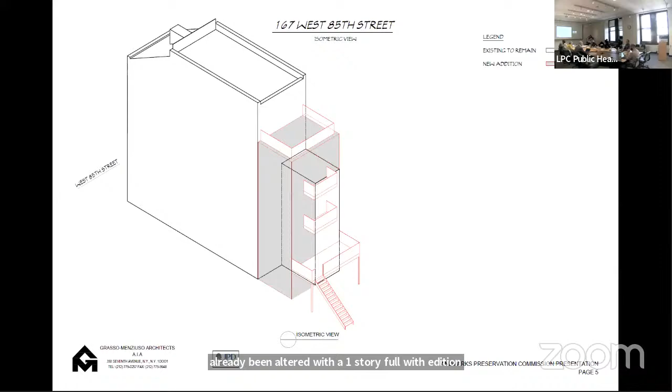Here's an axon to show you the proposed additional volume shaded in gray.

Here are photographs documenting the view into the rear yard taken from the roof, and the existing rooftop additions and rear additions at neighboring buildings to the east. It was somewhat difficult to get good photos looking deep into this block, so what I'm showing you today is unfortunately the best we could do.

You can see that there's a 1-story addition already added to the top of additions at the rear of 159 to 161 West 85th Street. Those were 2 houses combined at the interior.

You can see that a bit more in detail here at this center photograph—an addition on top of a pair of rear Ls, which has essentially created an addition similar in volume to what we're proposing today.

In the photo on the right, you can see the 1-story addition that extends pretty far into the rear yard at 169. Now, a bit about the development of this block.

At the end of the 19th century, it was a pretty homogeneous block in terms of building types and scale. As you can see in the map from 1897 on top, it was mainly characterized by row houses. By 1912, the block had lost that uniformity as large apartment buildings were constructed on 86th Street and at Columbus Avenue.

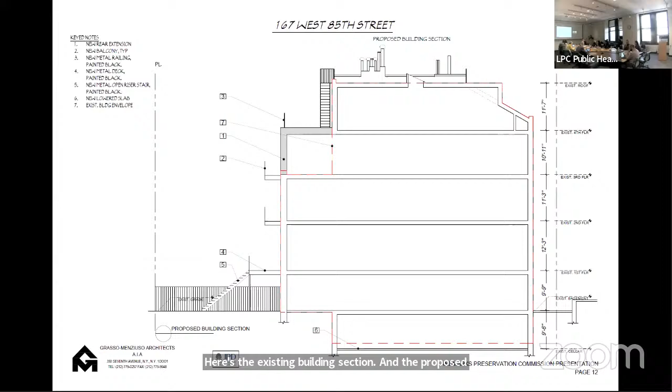Here's the existing building section and the proposed building section. There will be 16 inches of excavation at the cellar, which will not require underpinning. There will be additional excavation under the proposed addition, as seen here in this proposed basement plan.

And here we're just showing you existing and proposed plans for the rear yard, maintaining a planting bed at the perimeter and at the rear.

Just to show you some examples of similar approvals within this district: these are previous approvals from 2014 and from 2023, where you had full-width rear additions approved, and also a similar design for balconies in front of paired sliding glass doors approved in the last few years at 154 and 156 West 88th Street.

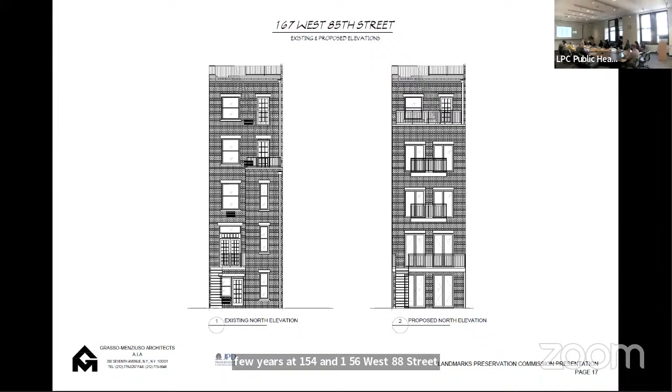And that is our presentation, and we look forward to your questions and comments. Thank you.

Do we have questions, commissioners? Yes, Commissioner Ginsburg: why are the window heads not lined up with the adjacent buildings as they were before the renovation on, I think, the second and third floors, and maybe third and fourth?

Well, I'm going to answer that, and then I'm going to ask the architect to also answer. First off, the building on one side, 165, was built as part of a different row, so those windows—I think they're shown a little inaccurately here—don't really align with the existing windows at 167.

So I'd like to ask the architect to give the rest of the answer to that. Thanks, good morning, my name is Nelson Cordero, I'm with Grasso Menziuso Architects.

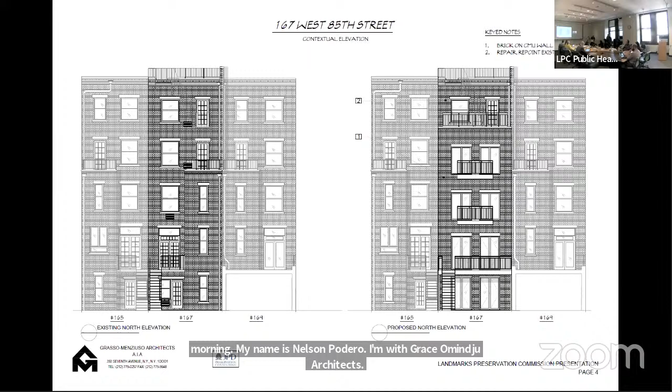To answer the question about the window alignment, as you can see, the adjacent window heads are pretty high compared to the new doors we're proposing. Aligning them with the same window headers would create a pretty large opening, which would go against what the rules are.

So I think the issue is that you're doing doors, and so you need to bring it down to the floor level. That's correct. And if you kept the lintel aligned, you'd have very tall doors, and you would sort of lose the order in height from the lowest floor to the upper floors.

Right, the proportions. Sorry—has the top of finished floor changed from the existing addition to your new addition? Did you change the floor elevation?

No, the floor elevations have stayed the same. It's just that it's doors instead of windows in the addition. So you see the little windows in the adjacent L, not only is the head higher, the sill is higher as well.

So if you just dropped the sill, how tall are the doors as you propose? Well, they're on different floors, but the first floor door is about 8 feet. I would say the basement and the first floor, and then the upper floor is at 7 feet, not a transom, just 7 feet.

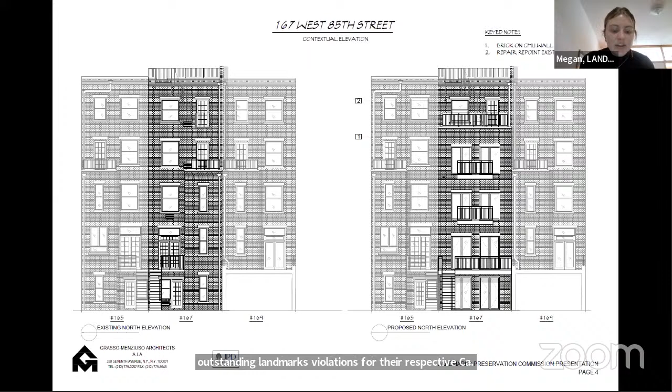Hello, Commissioners. Megan Fitzpatrick speaking on behalf of Landmark West. The Landmark West Certificate of Appropriateness Committee objects to this proposed 4-story full-width rear yard addition. Although at the edge of the district and at the edge of this row, if approved, this would be the only 4-story full-width rear yard addition within this donut. We bemoan the constant encroachment upon the donut and its impact on adequate light and air. Further, our committee takes umbrage with the fact that precedents cited are both projects with outstanding landmarks violations for their respective C of As. We urge the applicant to consider maintaining a 3-story height at the rear to preserve the donut and improve the quality of life for our community.

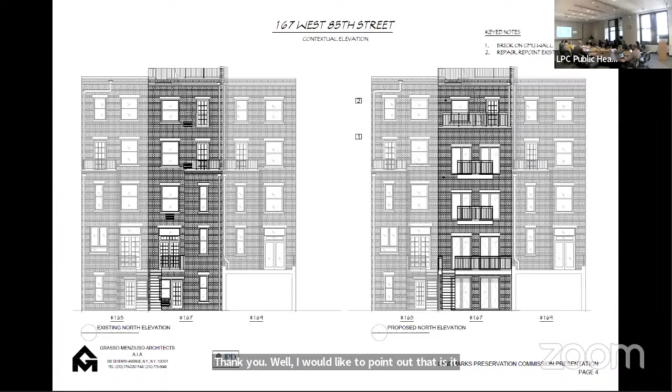Okay, so would you like to respond to the comments? Thank you. Well, I would like to point out, is it okay if I scroll again? I just want to get back to the block plan. Do I have control? Okay. Oh, okay, sorry.

So I just wanted to point out that in terms of the appropriateness of the size of this addition, there is that addition which you see in blue, which is a pair of rear Ls on the backs of 2 houses that were combined at the interior. But I think that this addition we're proposing today is comparable to the existing condition of how those 2 rear Ls were altered, because a 1-story addition was added on top of those rear Ls. So what we're creating is contextual in that sense, because you already have what is in effect a 4-story full-width addition, only by virtue of the fact that those 2 houses were combined together.

And yes, this is also an extreme edge of the district where the rear of this building isn't facing into buildings that are within the district. You have alterations that are already changing the relationship of this house to the other houses in its row, by virtue of the fact that you have this strange 1-story addition on one of the neighboring houses, and you also have very prominent rooftop additions that extend to the very rear facade on neighboring houses as well.

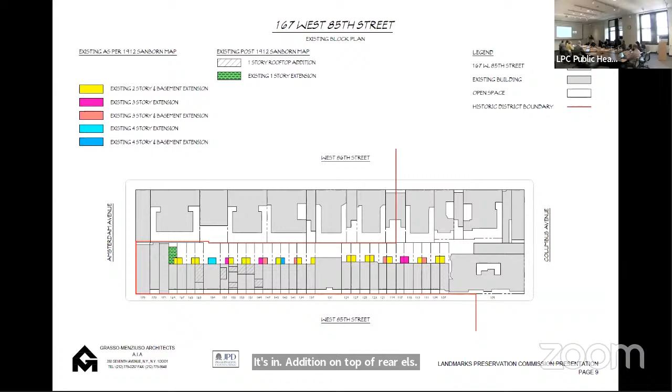Okay, thanks. Yes, Commissioner Jefferson. Do the windows align with the existing windows, is that the case? No.

The new windows in the proposed addition are actually doors onto a balcony, so they extend down to the floor, which the windows don't, and then they've lowered the head. So if they were taller, you could make them taller, but then you'd have taller doors, and so you'd have to imagine what those proportions would look like. Thank you.

All right, if there are no other questions, we'll move to our discussion. Commissioner Chapin, would you make a motion to close the hearing? So moved. Thank you. Commissioner Ginsburg, would you second that motion? Second. All in favor, say aye. Aye. Aye. Aye. Any opposed?

Okay, so this is an application to construct an addition that is no deeper than the existing L, but one story taller. We've had much discussion about the fenestration. They're proposing doors onto balconies in this case, and so their head height is lower than the head height on the windows in the adjacent L's. The applicant has shown that while the majority of the additions on this block are two and three stories, there are a couple of other examples where the commission has approved another floor onto the existing additions in the back. So we'll begin our discussion.

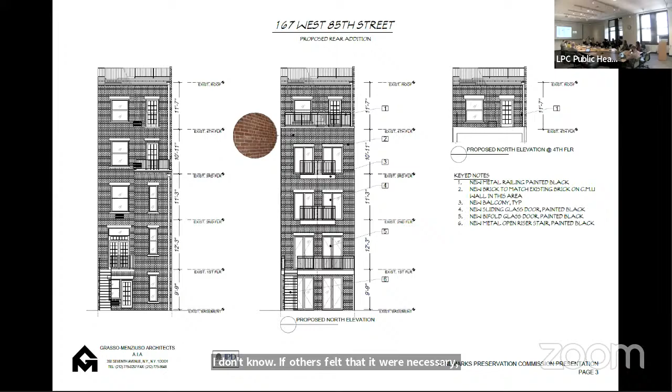Right, thank you. Commissioner Ginsburg? Well, I think I could live with the massing as is, although I agree with Commissioner Goldblum, it would be better if that top floor of the addition was set back a bit. I do think it would be easy to align the lintels and put a clerestory over the door if they didn't want to put such a tall door. So I would want to see that happen.

All right, Commissioner Chapin? Yeah, I agree with Commissioner Goldblum's suggestion about setting back the 4th floor. I can accept a pretty hefty addition because it is near these large buildings and across from these large buildings, and though it is next to, I think, a 1-story addition on the other side, there is some precedent for 4-story additions here. So, though not full width necessarily, I think I could go along with it if the top is set back. And the suggestion about aligning the lintels, I think, would improve its relationship, and is probably not that hard to deal with. All right, thank you.